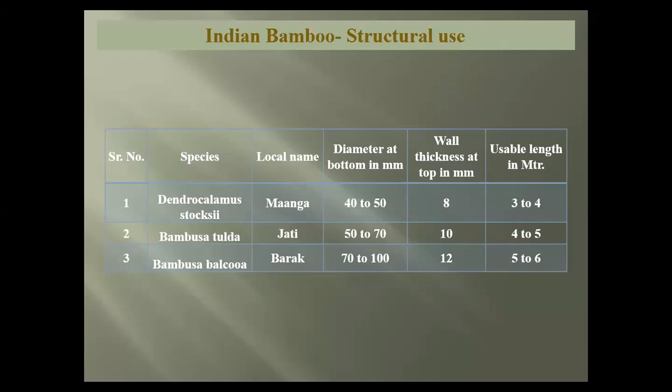When I am telling you this specification, you may be a little confused, so let me show you some pictures. This is Dendrocalamus stocksii, which is 40 to 50 mm diameter bamboo. This is Bambusa tulda, which is 50 to 70 mm diameter bamboo. And this is Bambusa balcooa, which is 70 to 100 mm diameter bamboo.

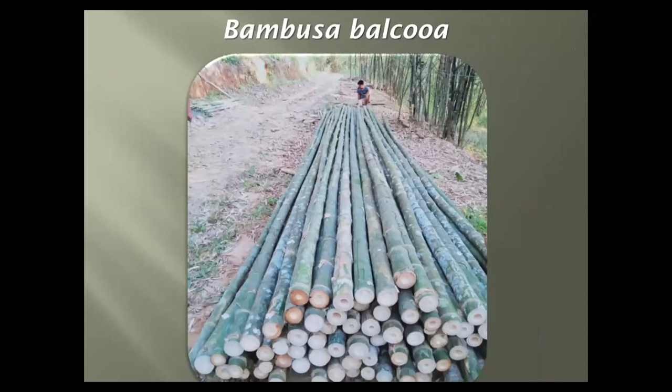Now let's talk about the grading of bamboo for structural use. Because if you want to use bamboo for a structural purpose, the first thing you need to know is the grading parameters. So let's talk about that.

The most important parameter is the species. Right now we are talking about the 3 species: stocksii, tulda, and balcooa. Then the second most important parameter is the age of bamboo. So you need to understand the difference between the growing pattern of a tree and the growing pattern of bamboo.

Bamboo achieves its full diameter and full length in just the first 120 days of its growth. It's not like a tree. If you plant a tree, it will keep growing for 30, 40, 50, 60 years, height-wise and diameter-wise.

For bamboo, it will grow in just the first 120 days. So if your plant is new, you may have a smaller diameter and smaller height, but it will grow for the initial 120 days only. After that, a new shoot will come and that will grow, but the same bamboo will not grow. So bamboo achieves its full growth, diameter and height, in just 120 days. After that, the fiber maturity starts.

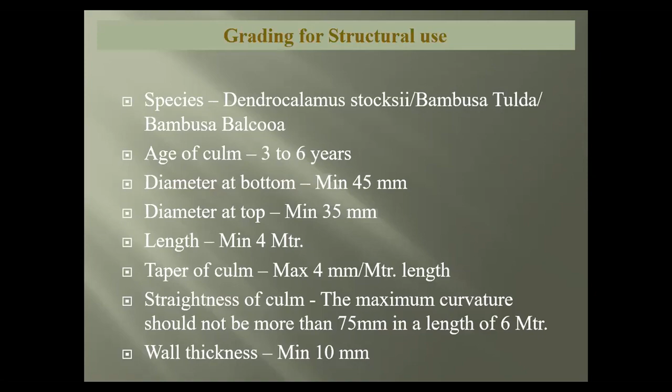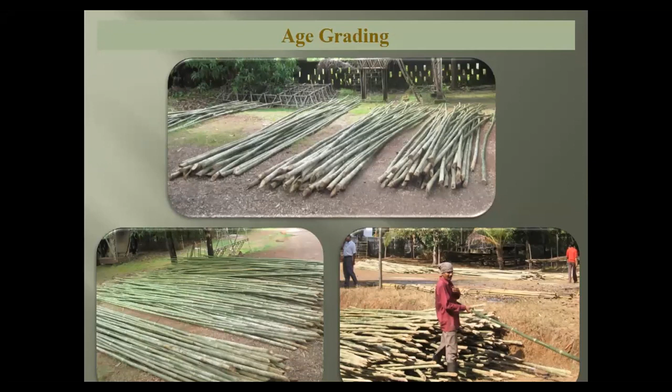This is typical age grading, done when bamboo is freshly cut. You need an expert who will visually recognize the bamboo, and this will change as per the species also. If you are an expert in recognizing the age of one particular species, the same rule may not apply. So you should be very careful about defining the age of bamboo. If your age grading is not proper while selecting, whatever treatment or joinery you use, you will be in trouble, because without having the needed fiber maturity, using that material for construction is not going to work at all.

Now let's talk about treatment of bamboo. Everybody should know that we have a proper IS code by Bureau of Indian Standard on how bamboo for structural purpose should be treated. Many times people ask me about durability and who will certify it. So everybody should know that if we have a proper IS code, anybody with any doubt should please refer to the IS code. Now let's talk about the method of treatment.

Method of treatment can be broadly categorized into chemical methods and non-chemical methods, where no chemicals are used. Traditional methods are where no chemical is used. There is the leaching method, the lime washing method, and the smoking method.

In the leaching method, bamboo is a bundle of capillaries, and those capillaries start collapsing within around 48 hours of harvesting. So if you want to take out the starch and sugar inside, your treatment should start within 48 hours of harvesting. Leaching is the process where, 100 years back, people used to harvest bamboo and put it into flowing water. You have to keep in mind that bamboo should be immediately put in the water, and you cannot put bamboo in water after, say, 3 days, 4 days, or 1 week.

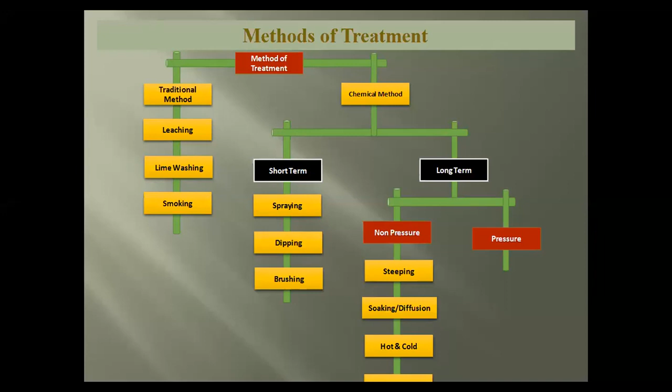Now let's talk about the toxicant. There are some natural toxicants available, like giant Indian milkweed, which definitely works, but you will not get long-term protection with this. So if you want long-term protection, the only option is to use a chemical preservative.

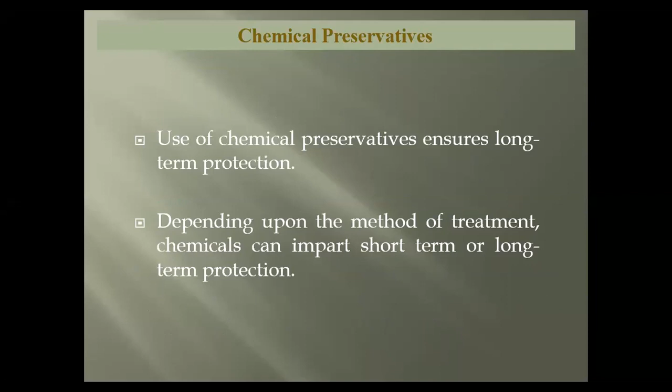And in chemical preservatives, yes, you have many options. Roughly, the first option is a waterborne chemical—water soluble boron-based chemical—and in that also you have two options: one is non-fixing, and the other is fixing. In the non-fixing option, suppose you are using that bamboo in an interior condition where rainwater is not going to be splashed on it directly, then you can always use a non-fixing waterborne chemical. The example is boric borax.

So if you are treating bamboo for furniture or interior construction components, which are not in ground contact, then you can definitely use non-fixing preservative. But if you want to use bamboo in an exterior condition or in ground contact, then you need to use a fixing type water-based preservative, which will have a chrome acting as a fixing agent. The most famous fixing type preservatives are CCA, CCB, etc.

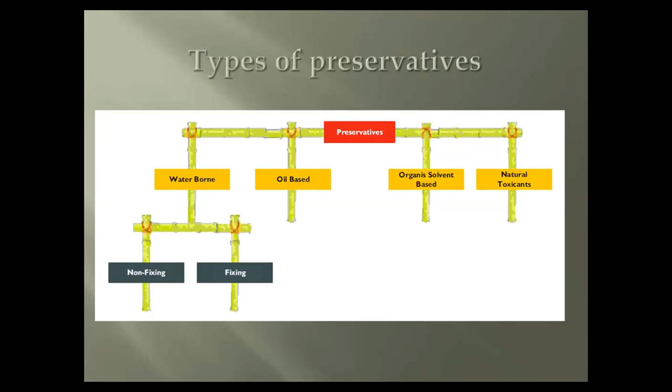You can also have oil-based preservative. Creosote is also an oil-based preservative. You can have organic solvent-based preservative, and as we said, we can have a natural toxicant also. A famous example of non-fixing type preservative is boric borax and copper sulfate.

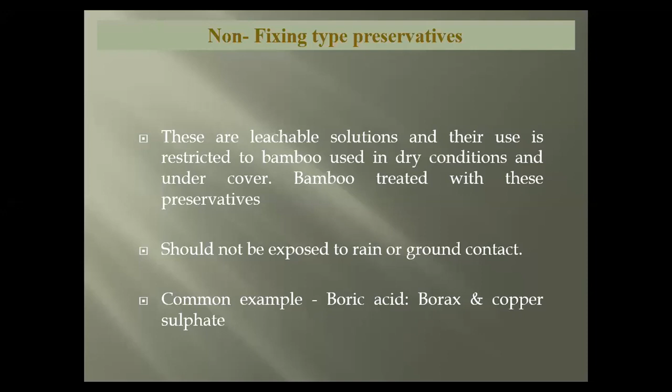Keep in mind that if you use this treated bamboo outside, the chemical can leach out if water is directly splashed, and once the chemical leaches out, you can again have attack of termites or other insects. So this non-fixing type should be used strictly in interior conditions.

Now when you talk about fixing type, CCA, which is arsenic-based preservative, is the most effective preservative, but it is banned in many European countries. It is not banned in India, but we also suggest everybody please don't use CCA.

Then the second best is CCB, which is boron based. Because CCA is arsenic based, and arsenic is a hazardous chemical, while treating bamboo your staff may have some side effects from that. So using CCB is comparatively safer. CCB is an accepted wood preservative across the globe. Even European countries use CCB as a wood preservative.

Because this has a fixing agent, once you impregnate this preservative inside the bamboo, it will remain inside for a much longer period, and there is no scope of it leaching out. That's why it is safe also, durable also, and as per our IS code 10013, you have all the needed standards of CCB, and this can be a very good option for treatment.

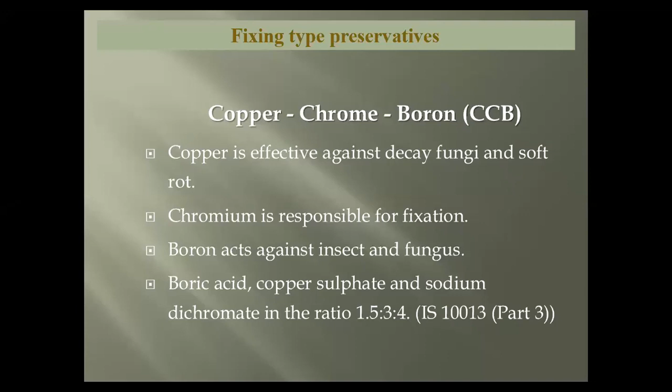Now let's talk about pressure treatment. Pressure treatment is the method invented by Forest Research Institute, Dehradun in 1955. They set up a treatment plant, treated bamboo, and out of that treated bamboo, constructed a building in 1956. From 1956 till date, this building is absolutely intact, not even one bamboo has started decaying.

This is the methodology and technology developed by our scientists in India, and I see everywhere in the globe the same method for pressure treatment is used. Not even 1% of its methodology has changed after so many years. Such fantastic research work done by our scientists in India, but somehow we never gave importance to this local material and its use.

In 1984, a Canadian agency started doing research on bamboo, and nowadays we use that Canadian manual which tells you how to treat bamboo, of course giving complete credit to FRI Dehradun. This clearly shows that after even 65 years, not 1% decay has started, so it will definitely last long for 150 years. This is the treatment invented by us. We should start using it more and more and make it popular.

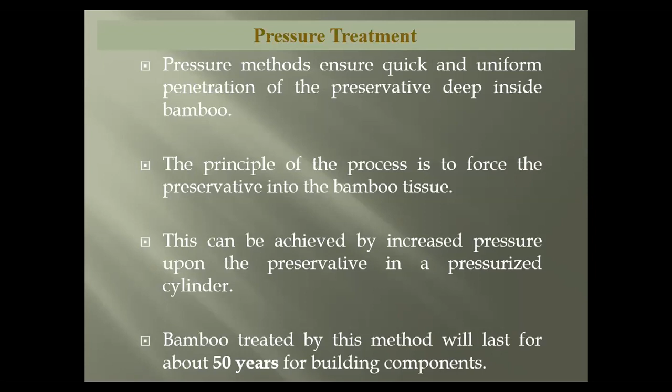So we implemented this pressure treatment plant in 2007 in Kudal. At that point of time, there were not many successful bamboo pressure treatment plants in the country.

So what we did is, with the help of a great bamboo preservative treatment scientist, Dr. Satish Kumar -- he's no more now -- from FRI Dehradun, with his active guidance we set up this plant, and quickly we could optimize the methodology of treatment according to our species and type of bamboo. I can proudly tell you that we have treated more than 50 lakh poles in that treatment plant till date, and not a single bamboo got a complaint about any infection or attack from any insect.

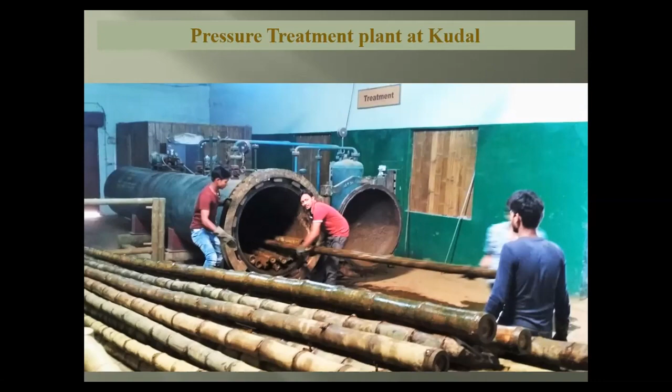That type of consistency and results which we could achieve with this Indian technology and a completely Indian scientist who is globally acclaimed, Dr. Satish Kumar -- thanks to him, and we should remember him as one of the great bamboo preservative scientists we ever had in the globe.

Now, after treatment, once bamboo is treated, your bamboo is now durable. Now you need to make the bamboo straight, because if you are doing construction and your material is not straight, it will be very difficult for you to use that material for construction.

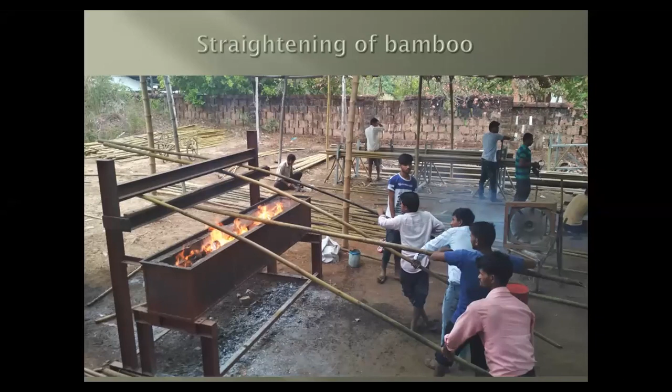So this is a very traditional and crude method of straightening the bamboo. You are just heating that bamboo on fire. When you start heating, the lignin starts liquefying. Once lignin is liquefied, you apply pressure, then the bamboo will change shape. Then you apply water to that part and make it cold, so the lignin solidifies again, and whatever change of shape you have, it will not retain 100%, but it will be retained around 50 to 60%. So this is the way of treating bamboo.

But if your artisans are well trained, you can make bamboo like this - it's absolutely like a pipe. For that you need patience, you need skill, because if you overheat it, the outer skin of bamboo will burn, and if you underheat it and try to straighten it, it will crack.

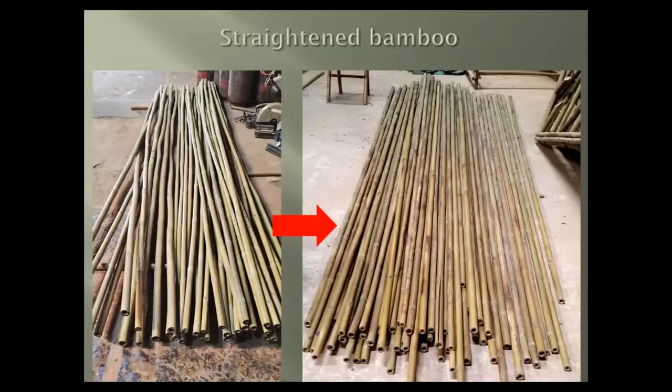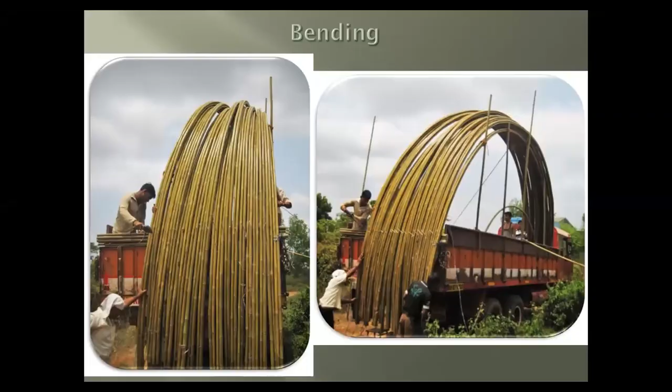Using the same method, you can even bend bamboo like this. So now you have material which can be absolutely straight, or can be bent uniformly as per the radius you want. Once you have this material, which we call treated and graded bamboo, doing bamboo construction becomes very easy.

Now the question is whether this type of material is available everywhere or not. When we started in 2007, it was not. Now the Government of India is actively promoting this. In Maharashtra itself you will get at least 3-4 locations where you get this treated and graded material, and the intention is to create more centers like this. Now the only thing is, people should start using it, so that this type of facility will be utilized.

So what we did is, once we had this facility, we started meeting architects and asking them why they don't use bamboo. We used to ask them, sir, which is the most eco-friendly or sustainable material on earth? Most architects used to tell us it's bamboo. Then we would ask them, sir, how many years have you been practicing architecture? They would say 15 years, 20 years, 10 years. Then the third question I used to ask was, how much bamboo have you used in your career for any type of construction? The typical answer was, no, we have not used bamboo.

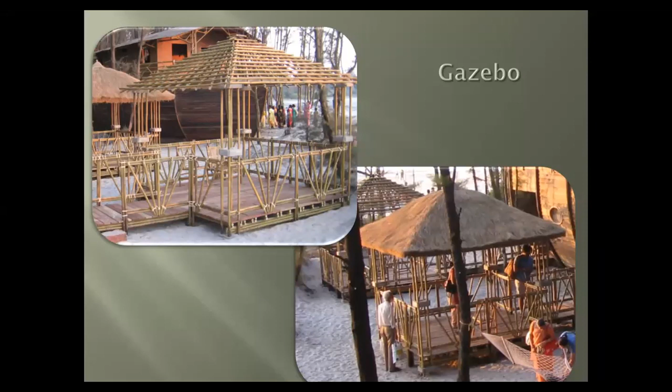So we started as an NGO, Konkan Bamboo and Cane Development Center. We are not supposed to actually do turnkey work, but when we saw that nothing was happening and creating facilities alone wasn't working, we decided we needed to start doing turnkey jobs also. We started with simple landscape elements, keeping in mind that the product must be both aesthetically beautiful and durable.

So when you talk about bamboo, if you go to the Northeast, you will see aesthetically beautiful structures made out of bamboo, which are very cheap, but not durable. There are many organizations in our country which can give you very durable structures, comparatively cheap, but not aesthetically beautiful - they will look shabby.

So if you are looking for a combination of Sundar Sasta Tikau - beautiful, cheap, and durable - it is right now not available in bamboo. If you want aesthetically beautiful and durable both together, it is not right now cheap. But we need to start using it.

As we use more and more, the price is definitely going to come down, because more R&D, more people will put their minds to it. Ultimately, when the dish antenna came to India, the company named Sham Dish Antenna used to sell dish antennas at 7.5 lakh rupees. Today you get a dish antenna at 750 rupees. At 7.5 lakh rupees also, there were many people who bought those dish antennas, and that's why today you see dish antennas at 750 rupees.

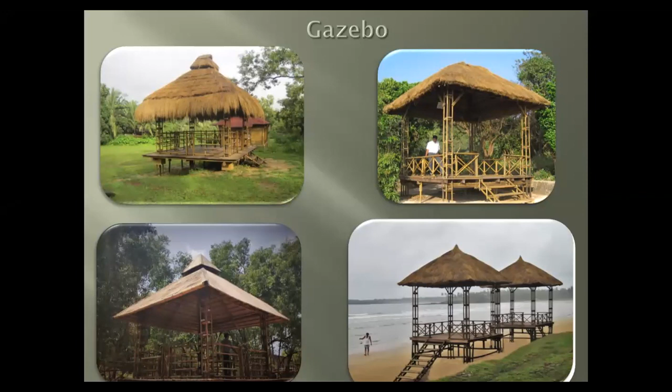So please start using bamboo. What we used to tell people is that if you start using bamboo, the prices will come down.

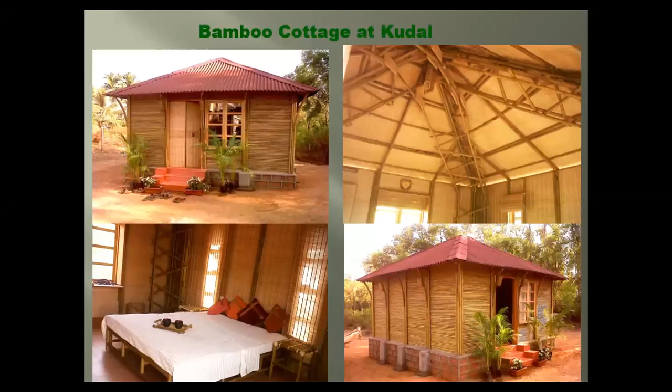So we got an opportunity to work for different clients, and slowly we thought we should now make a building. The easiest way to start is actually with cottages, because the cost of this type of bamboo building is more than a normal cement concrete structure, and why should a buyer pay more? So we thought the tourism industry would get value for money from this type of work, because they can charge more to their clients and get a better occupancy rate. That idea worked, and we started doing various types of cottages for different clients in different locations.

And slowly people started appreciating our work. They're happy with what we are doing. But the only limitation I had is, people used to say, oh, you make that bamboo hut. So I used to tell them, boss, this is a very, very high-end, fully air-conditioned bamboo cottage. Why are you calling it a bamboo hut? The cost of this one cottage is 13 lakh, 15 lakh. Why are you calling it hut, just because it is made out of bamboo? If I argue like this, people used to say, okay, what you say is right, this is a cottage, not a hut.

Next time I meet him, after some time he will again say, oh, you are the person who makes that bamboo hut. So I started thinking, in spite of doing all this work, giving training to my artisans and trying to gain the best aesthetics, people still call it a hut. Then what is the motivation to my artisans? Because typically bamboo artisanship is linked with the lowest caste of society, so there was a stigma for the younger generation to start working with bamboo as a material. We could bring in a lot of glamorization and change that scenario. But if you don't give respect to the artisan, and money, not only respect, then it's not going to work. Respect and good money, only then will you find the best people with special skill doing this type of work, and the end result will be a much better product.

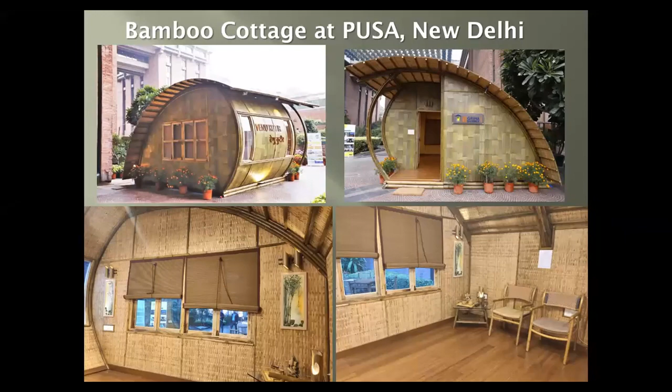So we thought that to change this scenario, we need to work more and change the overall perception of a bamboo hut. To tell you about how typical construction is done, say about the foundation: the first option is to make a column of bamboo just like any other metal or cement concrete column. You dig a pit, put a bamboo mesh, then put a bamboo column, put boulders and fill the pit. Because a bamboo structure is light in weight, you have to worry about it blowing off, so you need to anchor it down, and using this type of column you can do that. This type of column can be used where no cement concrete construction is allowed, like CRZ coastal regulation areas, forest areas, or sanctuaries.

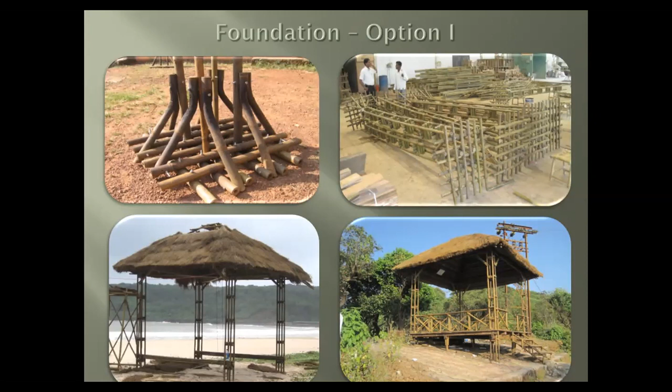Second option is the same method, but with an addition of a ferrocement band. This method is invented by IIT Delhi, where you use just a ferrocement band and everything else is bamboo. Because you are using that band, this much cement is allowed even in a non-construction zone area.

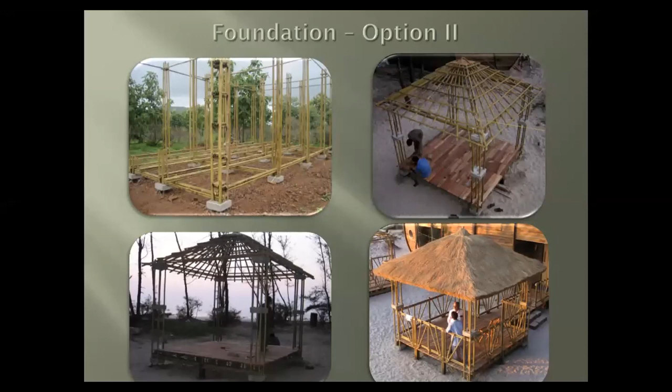Third option is putting your column directly into the concrete. While doing this, you have to keep in mind that when you put bamboo directly into concrete, whatever treatment you do for preservation—CCB, CCA, pressure treatment—during concreting, bamboo will absorb the water and swell. After the water goes off, it will contract and create a crack between the concrete. There will not be good bonding because the outer skin of bamboo has a lot of silica. So whatever bamboo you are putting inside the concrete needs to be made completely water repellent.

That can be done by applying a secondary treatment of the hot and cold creosote method, where you need to boil the creosote. Of course, creosote is an inflammable material and you have to boil it, but that is the only option. Creosote is a typical combination of diesel and coal tar. If you apply that method, that portion of bamboo becomes completely water repellent. Then you put it inside the concrete, it will not absorb any water, and this type of arrangement will work well.

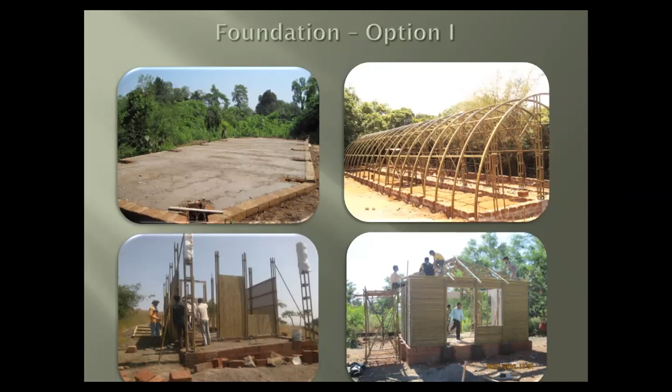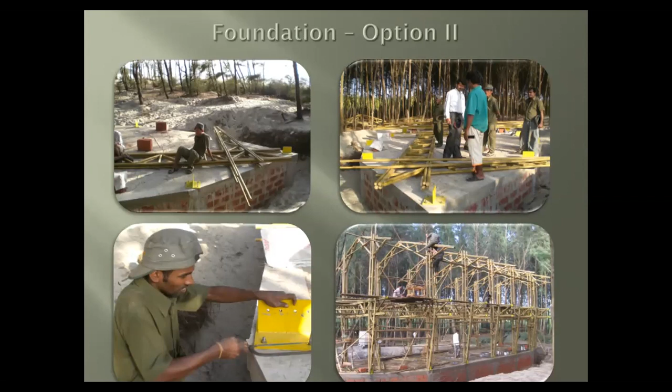Second option is to fix a T-shaped plate on a cement concrete band, plinth band, and on that plate you can nut bolt, with the help of nut bolts, fix the bamboo columns. This type of structure will be called a dismantable structure, theoretically. It is allowed even though you are not actually going to dismantle it, but this will be called a dismantable structure by the government.

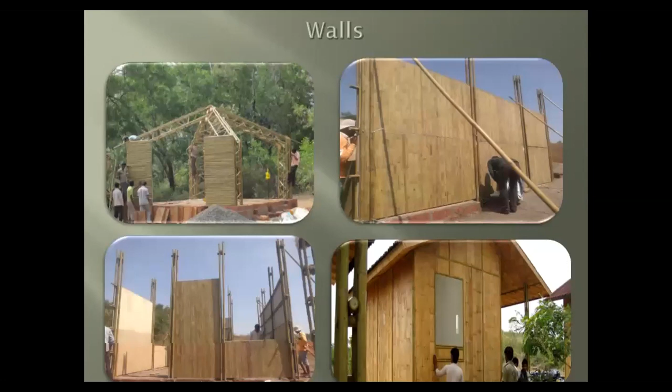So this type of bamboo skeleton can be made. Second is walls - you can flatten the bamboo to make a wall. Flattened bamboo can be pressed on any type of board - cement fiber board, eco board, WPC. Flattened bamboo can be pressed in two different methods: the top one is cold press, where you have a 3D effect of bamboo, and the bottom one is hot press, where it is an absolutely flat board.

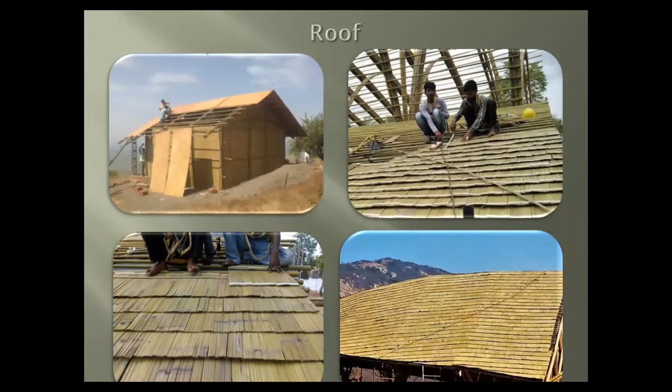In a roof, you can use a shingle. Flattened bamboo shingle is a very, very popular material in Colombia, Bali, Vietnam - not in India. We have started using this material for the last few years, and aesthetically this looks very good. This is a 4-layered roof. Of course cost-wise this is very, very high, but aesthetically it will have a very good effect.

So we decided that we will try to do bigger buildings with bamboo. We approached our structural engineer, who has been trained in Colombia, and he told me, Sanjeev, if you bring bamboo and tell me these bamboo are from so and so species, how will I know that the data given for that particular species actually belongs to that bamboo? So there is no way, and you cannot test each and every bamboo.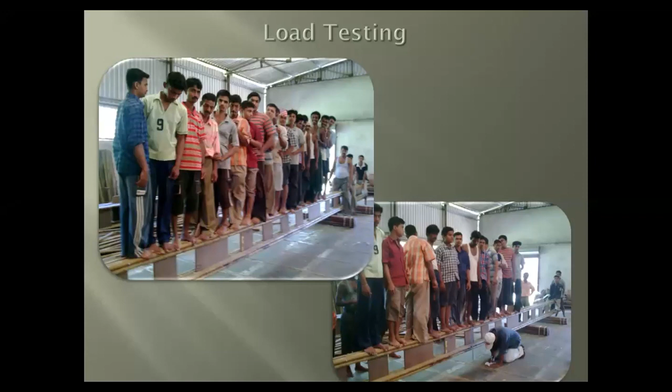So he decided let's have a 1:1 size bay and do live load testing, and only after that will I certify the structural stability, and I can give a design calculation to the client, because ultimately the design calculation needs to be submitted to the client for getting confidence that yes, this is possible and whatever you are doing is technically safe.

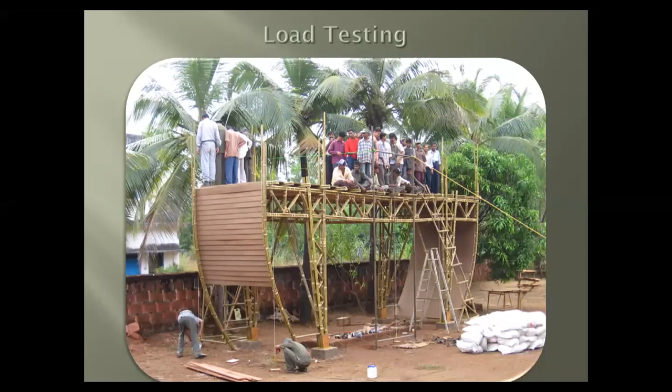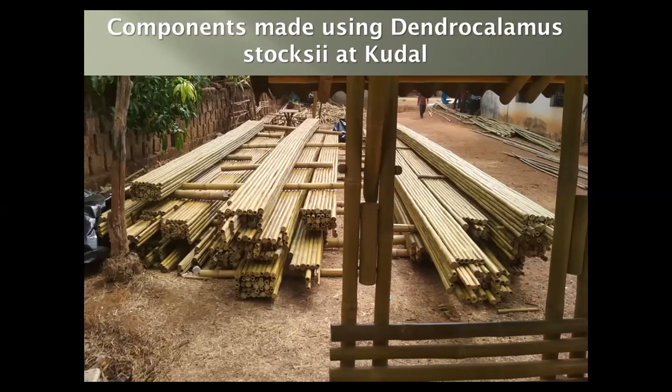So we did that, and then we decided to have a prefabrication unit in Kudal, in Sindhudurg district, at our place, where all components are prefabricated just like metal components. This is the Dendrocalamus stocksii, which is supposed to be a low diameter bamboo - we started using that to make even bigger structures. Once all these elements are prefabricated and packed, they're sent through a bigger trailer to the site, and this is the actual erection of the structural components on site.

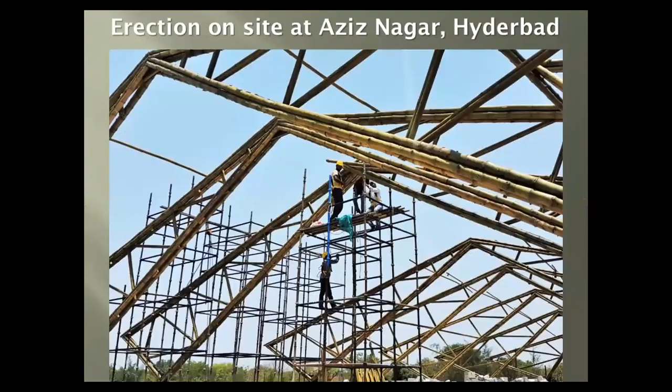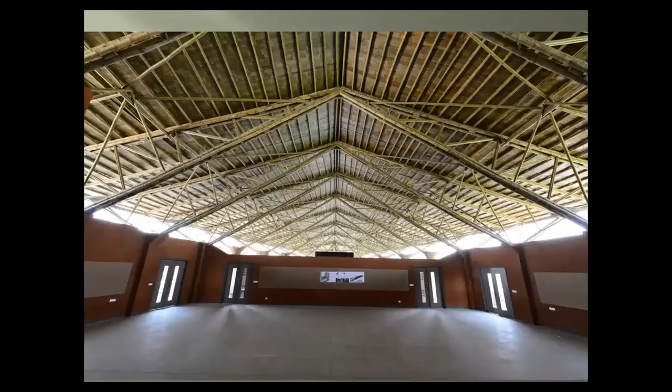So you see that we actually started doing much bigger span structures. The major breakthrough we got was in Hyderabad, where one of the builders asked us to do 10,800 square feet of a clubhouse for their villa project, and that was a real breakthrough because this is a 64 feet span structure. The complete roof is done in bamboo, and this is the first instance where we could demonstrate that with Indian bamboo and Indian manpower, you can really have an aesthetically beautiful and durable structure with a fairly large span. After successful completion of this project, we started getting multiple projects.

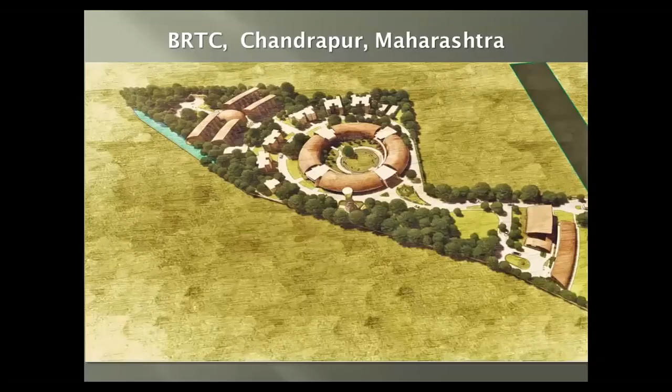I was talking to the Forest Minister of Government of Maharashtra, requesting him - sir, we have constructed 10,800 square feet of a building in Hyderabad, let's have one bigger building in Maharashtra. So he asked me, what size are you thinking? I said, sir, at least let's have 12,000 square feet. So he asked me, why not 1,20,000 square feet? I said, that is great, sir. So he said, let's have 1,20,000 square feet of a complete campus in bamboo in Maharashtra.

And we also felt that acceptance from government will make all the difference. So this project is of the forest department - it's a research institute executed by PWD. Luckily, we are fortunate enough that this project got support from Ratan Tata himself. Tata Trust is the project management agency for this project - they have taken responsibility for selecting the designer and making all the arrangements. And fortunately, we got this work built.

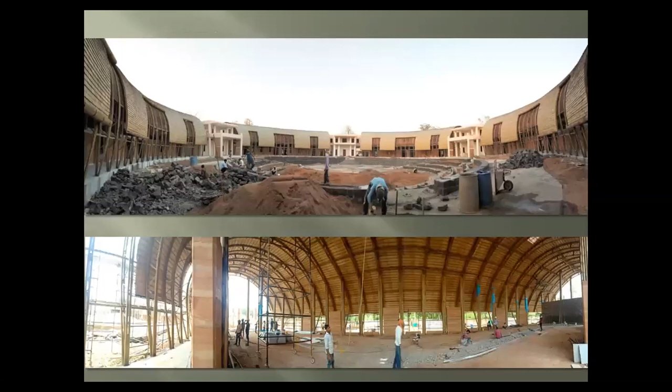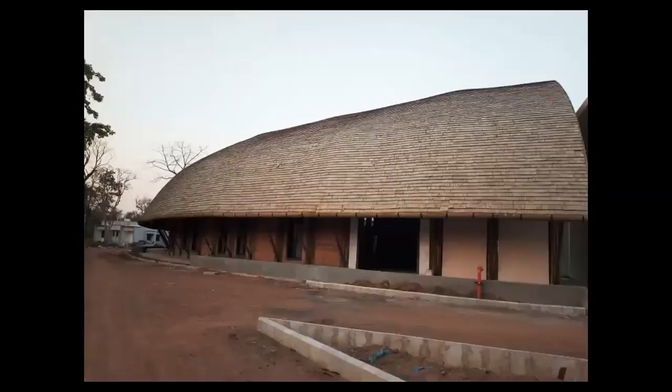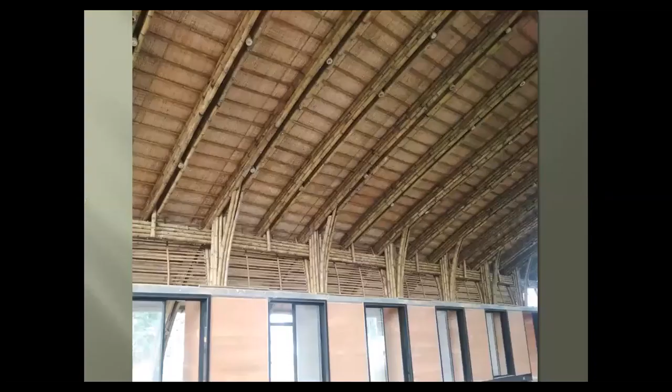So this is more than 1 lakh square feet of campus, nearly completed now - 95% of the work is already completed. And now in India you have a project where you can demonstrate that yes, proper bamboo building with large spans, multi-story, with different types of structures and different types of joinery and different species is possible.

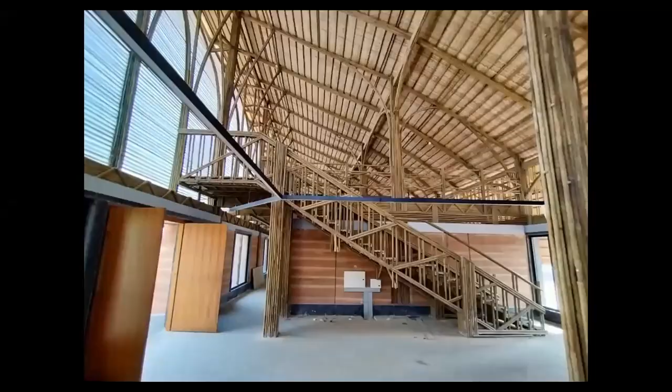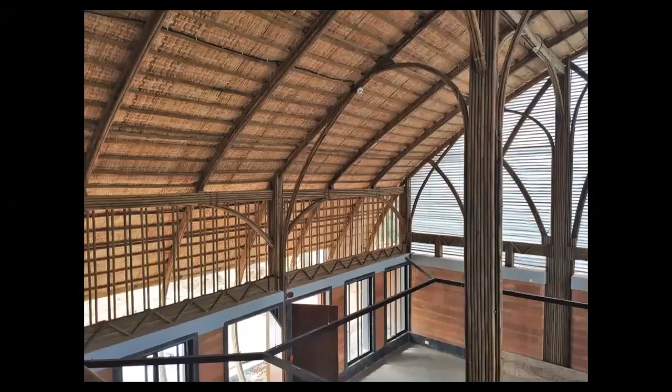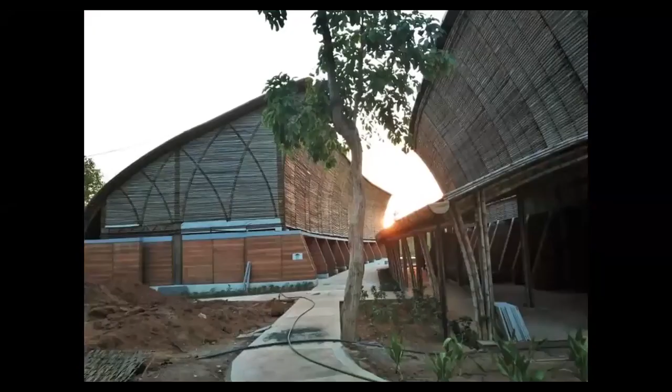So this is a Bambusa balcooa, what you see here, and this is a Dendrocalamus stocksii. This is a 100mm diameter bamboo and this is a 50mm diameter bamboo - altogether different species, different joinery, different vocabulary. This gives us confidence that in India we can do bigger structures in bamboo and people start appreciating it. PWD was the executing agency, absolutely helpful and supportive in making this successful, and I'm very, very thankful to all the engineers of PWD for really helping us do this type of work in India.

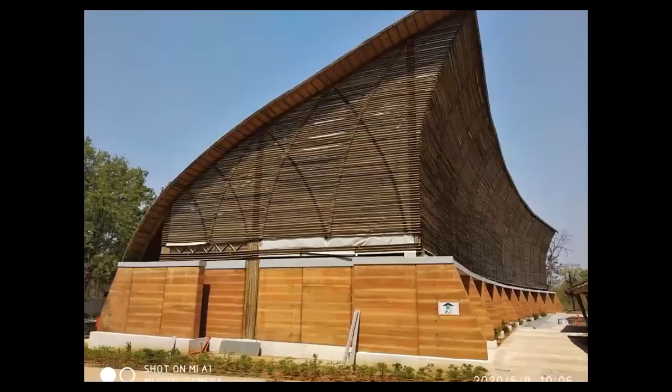There was always worry, everybody told me that PWD is not the right partner because you need to do so many things new for the first time, and how PWD can help you. But actually we got an altogether different experience from PWD, and this project is nearly completed now. After doing this, there is a major question about pricing, because we need to prove that our pricing is competitive.

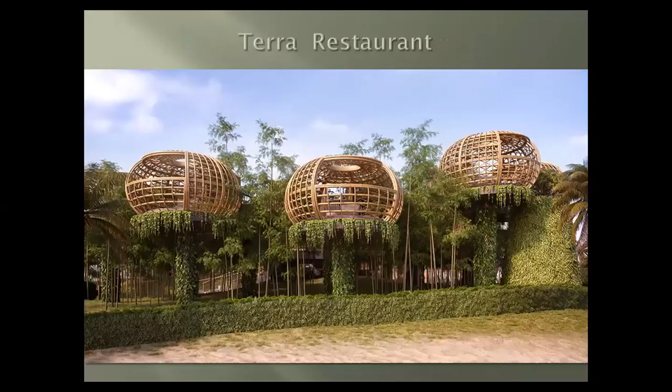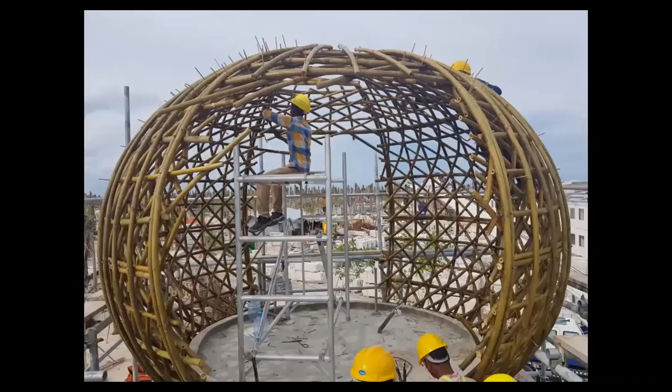So we decided to go outside India and bid with the strong players outside India. We got the opportunity to work for this resort in Maldives. The restaurant is in bamboo. We got that work, and we have bent bamboo in our workshop. Then we prototyped it in our workshop at Kudal, and this is the actual work on the actual site.

We were able to complete this work, and this particular work has been recognized as one of the world's top 16 best waterfront restaurants by CNN UK. So we were able to prove that with Indian bamboo and Indian manpower, you can actually go outside and compete with China, Indonesia and Philippines, and do much better at competitive rates.

And we are extremely happy that India can do it. We have shown that India can do it, and we don't have to worry now about the competition, what China is going to do. Our manpower, our bamboo is really sufficient to compete with any other player across the world.

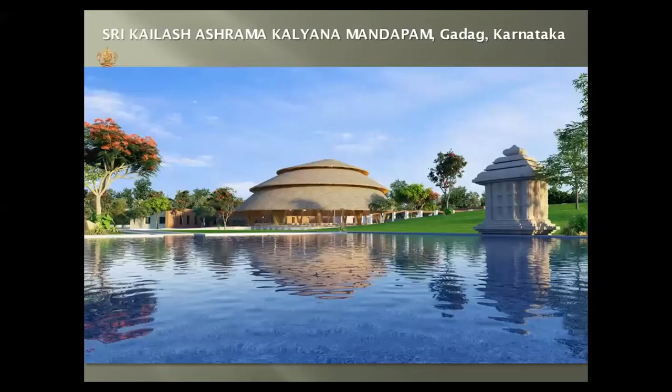The only limitation in this particular work was that it is a handcrafted type of work. So even though the bigger building is done, its method is crafting, and that's why it is not replicative. So we got a chance where we said we will now change the method of doing it, and we will do bamboo building just like any other pre-engineered building.

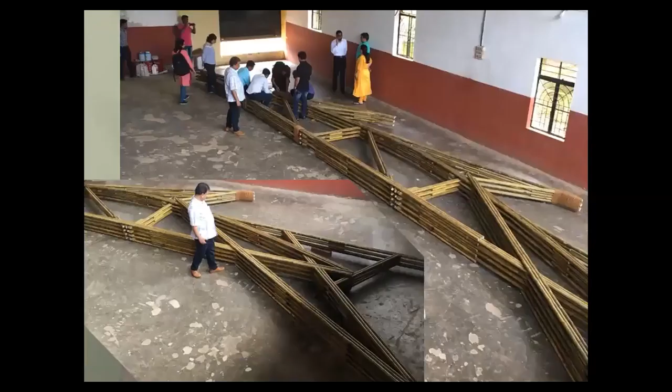Typically, pre-engineered building is done in metal. We said we will do it in bamboo. The chance was given to us by Raja Rajeshwari Temple Trust from Karnataka. Thanks to Mahaswamiji, who could visualize this. This is a banquet hall which we are constructing for them with a 500 people sitting capacity, 24 meter span, and all the components are made in our factory like this, and this is the actual erection on site.

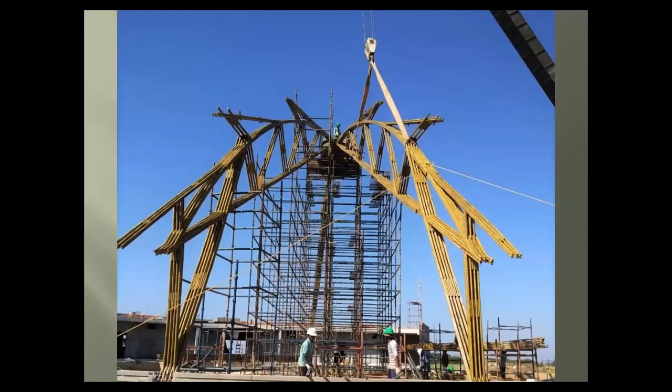Now you will see that the accuracy which we achieved, the methodology and all these things achieved is absolutely as per any pre-engineered metal building.

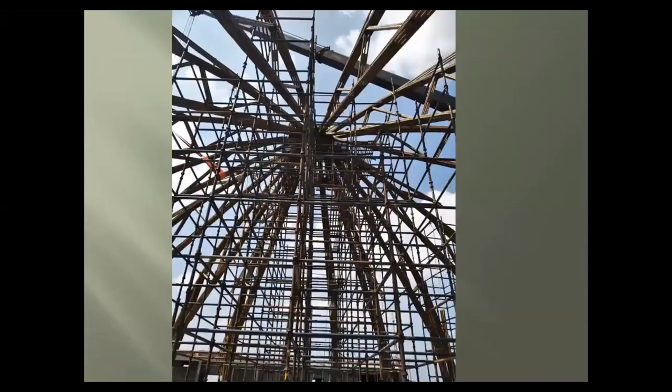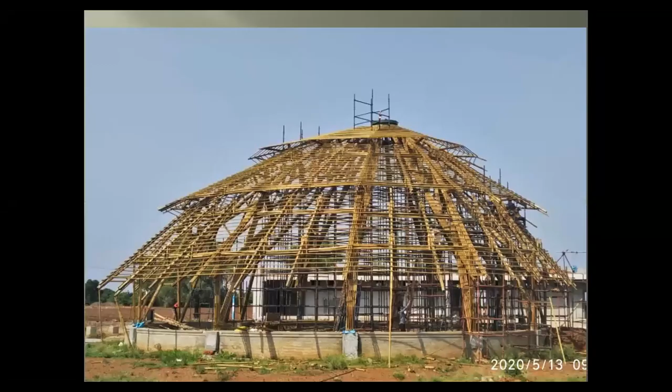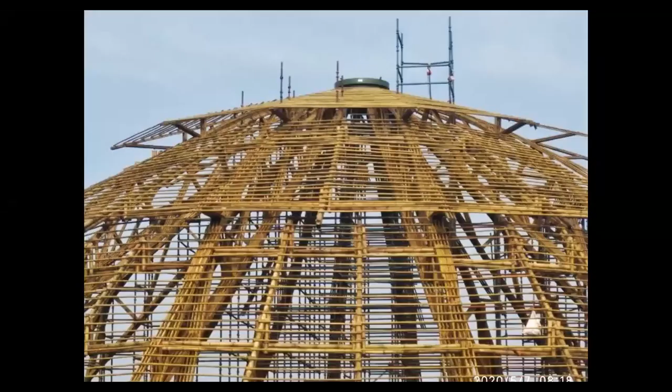We were able to join hands with Jans Bamboo, our joint venture partner, to bring in the best manpower, best systems in place, so that this could be made possible. And now I am extremely happy that we could take this bamboo construction to a level where it is just like any other pre-engineered building, with very high class artisans achieving 100% accuracy. This accuracy we were able to bring in using non-uniform raw material, and that is hats off to all my artisans who are highly trained, committed. They are just like family to us. So this is about bamboo construction.

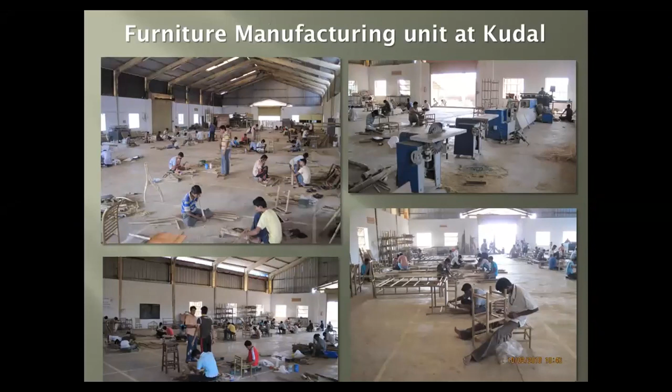Then we ventured into bamboo furniture. This is our furniture manufacturing unit at Kudal, and we do it in numbers. All this furniture is without any metal nail - all the nails used here are bamboo pegs, so it will have fantastic durability. We started using different colors keeping in mind the taste of the customer, and different materials like jute weaving and cushioning. All this got excellent response from the client, and we are happy that people are accepting this type of product.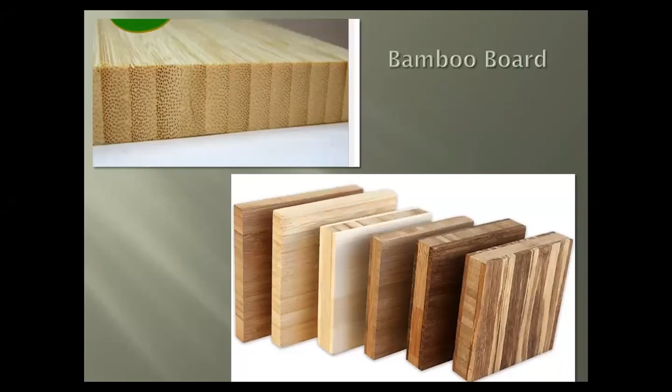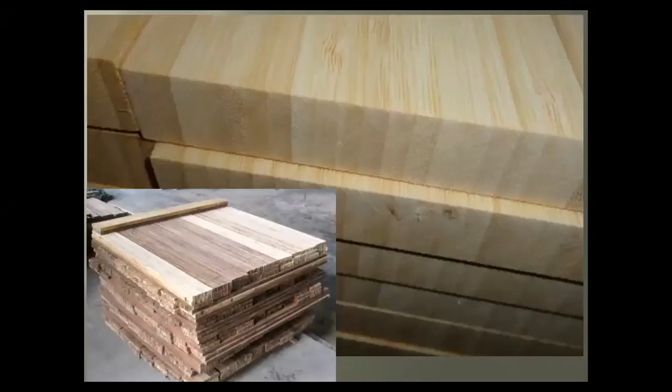If you press it together, this is a bamboo board which will have a density more than Burma teak, dimension stability more than Burma teak, and screw holding and nail holding capacity at par with Burma teak. We are fortunate enough to get support from Ratan Tata ji to do needed R&D in a strip board in India. We have converted bamboo from Karnataka, a species called Brandisii, into this type of board.

That board is then converted into furniture. All this furniture is made with Indian bamboo, 100% bamboo, and you can do carving, engraving, molding, everything is possible. Then we got a chance to do work for Infosys.

This is a VVIP guest room, Infosys CEO's guest room at Gachibowli campus in Hyderabad. Right from flooring to roofing panel, everything here is bamboo. This proves that bamboo can literally compete with wood in any form, and this gives us confidence that we can do it with Indian bamboo also.

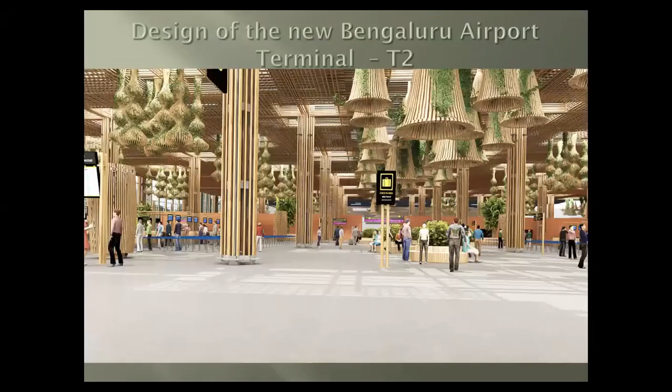Now there was a major question of how to change the perception of bamboo as a poor man's timber. So we are fortunate that the Bengaluru International Airport phase 2 work is coming up. This is in the design of a T2.

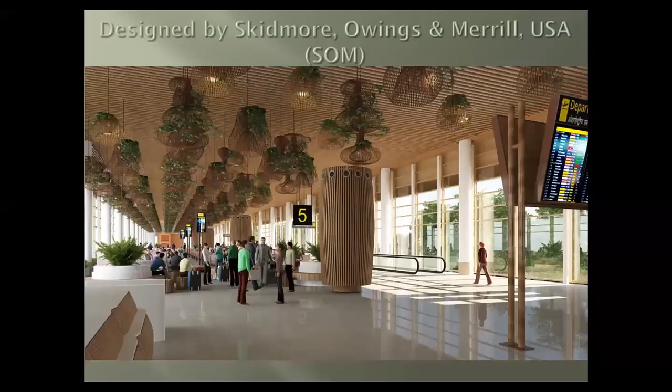This is 255,000 square meters of a terminal, completely to be done in bamboo interior. An American company is doing this, and an American architect has designed this. Work has already started, expected to be completed in the next 1.5 years.

With this, I am very sure that the overall image of bamboo is going to change, and bamboo will no longer be a poor man's timber in our country. Now the major question is how to train young minds, and yes, we are doing that work also.

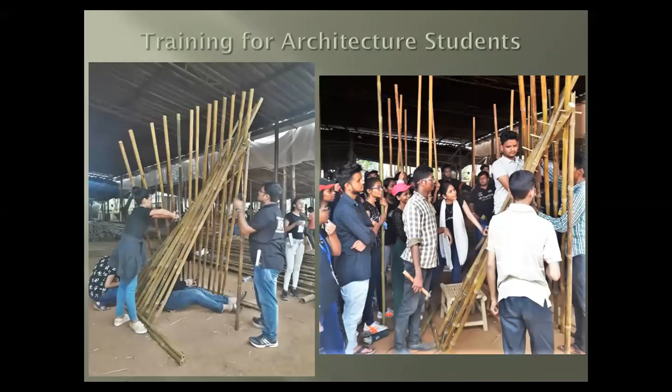We conduct various types of workshops where students from India, abroad, architects, architect students and other students also participate. I'm very sure that the younger generation has to come forward to start using this material and make it mainstream. I'm seeing a very good response from the younger generation, and I'm sure the time will come when bamboo will be fashion in our country. Thank you very much.

That was brilliant, it was breathtaking, though in the initial stages, as you presented some of those slides on the technical aspects, you must have had some interest sagging. Everyone is impatient to see the aesthetics and the kind of technical fusion you have brought. Many questions for you, Sanjeev.

Thank you once again. One question is, when you do these large spans, from 64 feet structures to things you have done at 25 meters and so on, how much of the input comes from the architects, the presiding architects of the project, or the structural consultants of the project? Or has it been completely yours as the design goes?

Typically, we tell the architect that if you don't have experience working with bamboo, the best way is, before designing anything, let's sit together, structural engineer, my team, and the architect's team, and try to understand the plus and minuses of the material. Once he understands that, designing is very easy. Many times the architect comes up with his own idea, and then structural engineers and my team need to tell him that this will not work. So if the architect doesn't have that experience, we need to do that. Now luckily in India we have a few architects who have the needed experience and they don't need this support.